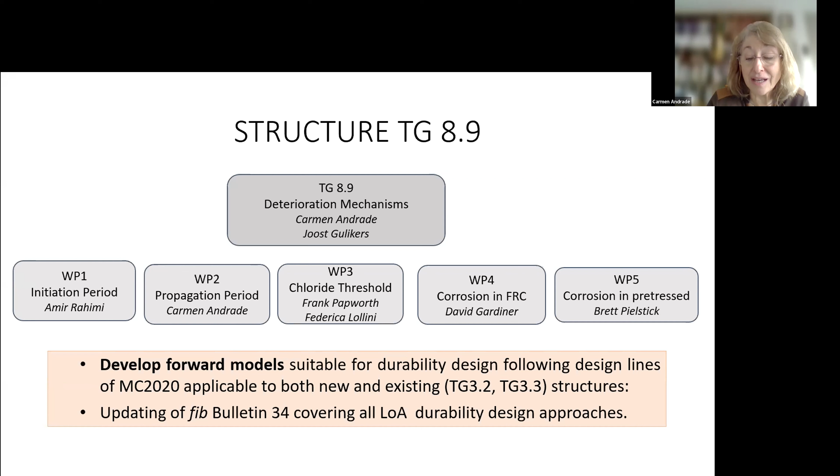Good day, everyone. I use good day advisedly because it's different times in different parts of the world. I'm going to be talking to you about a bulletin that we have started to produce, and I will start by describing that. It's on the critical chloride content of concrete.

The objectives of the bulletin were to give clear guidance on the use of CC, critical chloride level. The bulletin will review the research on critical chloride, and there is an absolute abundance going back over 50 years. We're very fortunate that Ueli Angst has done a great job over the last probably 5 to 10 years reviewing a lot of that information, and his latest paper was published in 2022.

He will be on the committee and will provide invaluable input on that. One of the main things this document wanted to address was the extension of the critical chloride level from the current single version in Bulletin 34, FIB Bulletin 34, to try and tighten it down for different exposures and so on.

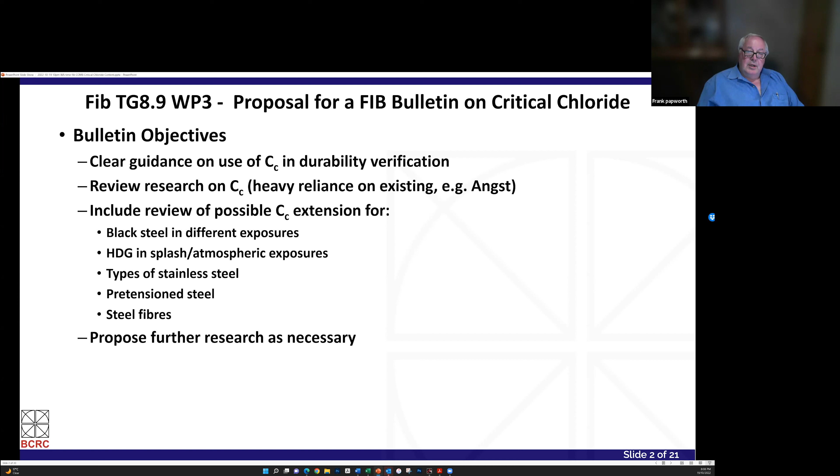So there's a list of the different things we wanted critical chloride distributions for. Apart from identifying these things, we also wanted to identify what research was still needed, and I think that will tie in with new and better models over the next decade.

So far we haven't had a committee meeting for this working party. We do have a draft document, an incomplete draft I should say, which we want the committee to review and help build up. Anybody prepared to join that committee should contact Federica.

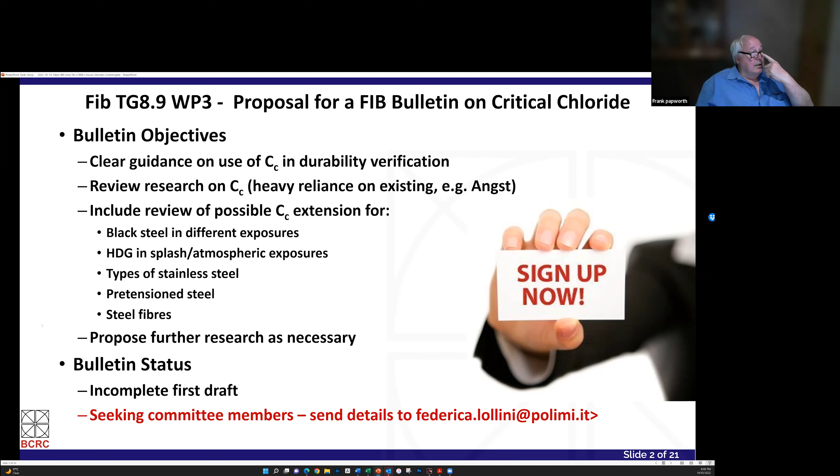First of all, then, what is CC, the critical chloride level? It's essentially, as we probably all know, the level at which steel might start to corrode.

For many years in the early days, back in the 70s, a lot of people were using a single value. These days, we pretty much all use a distribution for the critical chloride level, and it's quite a wide distribution.

There's quite a number of things which will be in the bulletin which I won't be discussing here. They're listed there, it's just not enough time to go through them all. They will be reviewed in some detail in the bulletin based on previous reviews in the main, and there's several major reviews that have been done. It's quite interesting looking back at the history.

The common value for critical chloride is 0.4 weight percent of cement. But looking in the 70s, 80s, and even the 90s, there was never really any stochastic value put on it—it was just a value quoted of 0.4. And very often I couldn't determine whether people were quoting a characteristic value or a mean value. So we need to be careful when we look at some of these old texts and compare them with more modern data.

Bulletin 34 published a distribution, and here we can see it with a mean value of 0.6, a standard deviation of 0.15, and limits to the skewed distribution. That's how the critical chloride level is defined in Bulletin 34. I did try and find where that came from, but it's unreferenced. We assume that Bulletin 34 in general came from the DuraCrete project, so we assume it came from there.

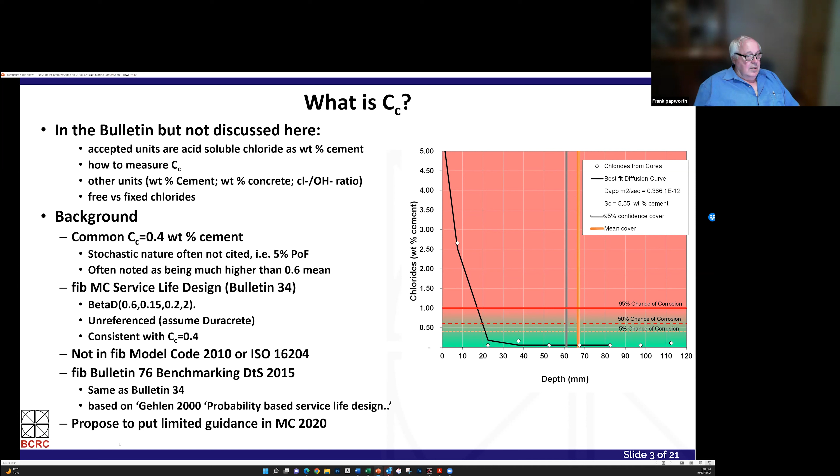We also think there should be some guidance on how to limit the use of the critical chloride value in Model Code 2020.

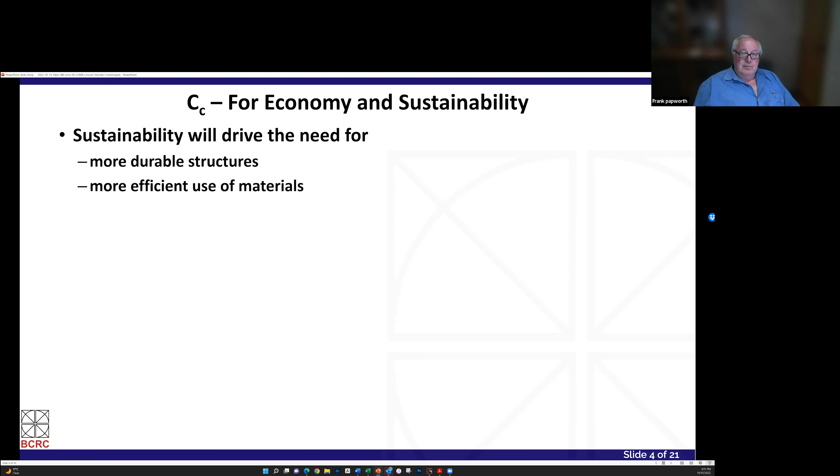Why is it important to know more about the critical chloride level? Well, sustainability is becoming ever more important, and that's going to drive the need for more durable structures and more efficient use of materials. Having a good model and great understanding of critical chloride is essential if we're going to benefit from that. These values will drive the use of these materials because we know how to use them, and we will know how durable they will be—so huge potential savings on whole of life costs.

So in my opinion, because there is still such consternation, as we'll see, about what the critical chloride distribution should be, research funding for the critical chloride value and modelling would reap huge global rewards in the future. And we'll get some inkling of that.

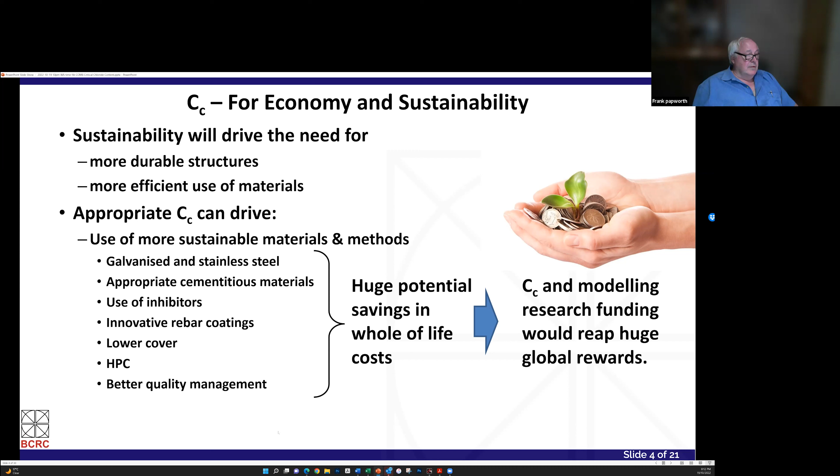The fickleness of critical chloride—it was interesting, and we will hear from our next speaker about his experiences with high chlorides and no corrosion. Going back to 1973, Stratfull looked at bridge decks and the critical chloride level for 15 to 25 MPa concrete. So this is concrete of very low quality, if you like. That's also an issue we need to bear in mind: people are developing values for very different quality bands of concrete, and we shouldn't be mixing them up.

What he recorded was that the chloride level determined whether the steel went from passive to active, but he found there were certainly lots of cases where the steel had become active with no visible corrosion, which tells us that visual assessment is probably not the right way for assessing critical chloride values.

He also noted that the actual rust that occurred depended mainly on the moisture content. He found no corrosion in cases where there were massive salts, unless there was sufficient moisture. He concluded that a prerequisite level of chlorides for bridge deck corrosion was 0.32% by weight of cement, but pointed out there's no corrosion at very high levels of chlorides.

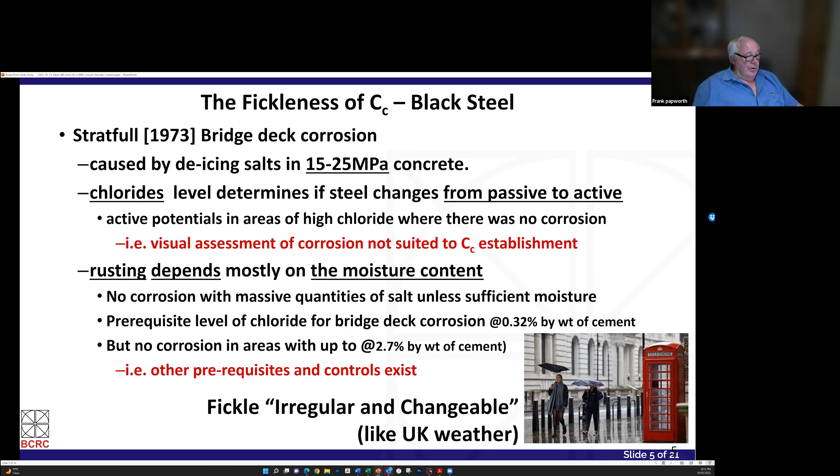So CC is expressed as a distribution for full probabilistic analysis, but wasn't considered as a distribution generally until the 1990s.

Already mentioned that in the 1970s, it was suggested, based on early research such as Stratfull's, that there were three main prerequisites for corrosion: chloride threshold at the reinforcement, voids around the reinforcement. And when we talk about voids, you might be thinking of honeycombing, but we're really talking about much smaller voids in terms of this corrosion.

We should, in fact, just exclude honeycombing, large bleed defects, etc., from our analysis of CC altogether, because we just shouldn't permit those things.

And the concrete within a certain moisture range was necessary. Low moisture contents, high resistivity, no corrosion. That might be irrelevant for chlorides. It's a fact. And saturated concrete has voids filled with high pH water, which is important.

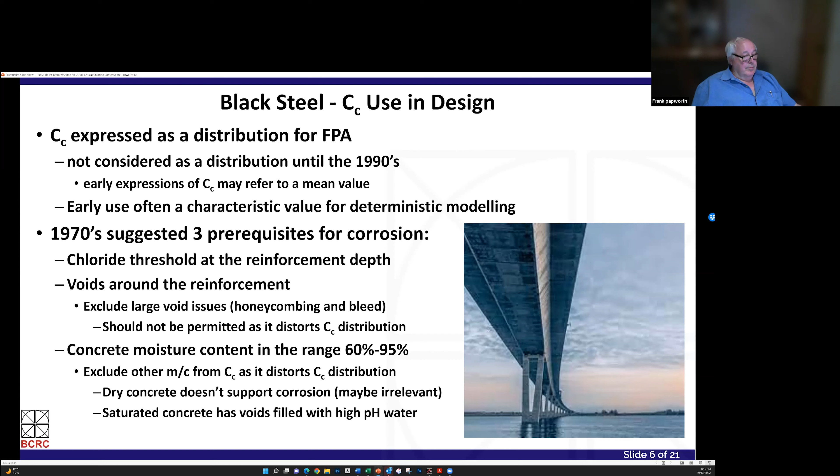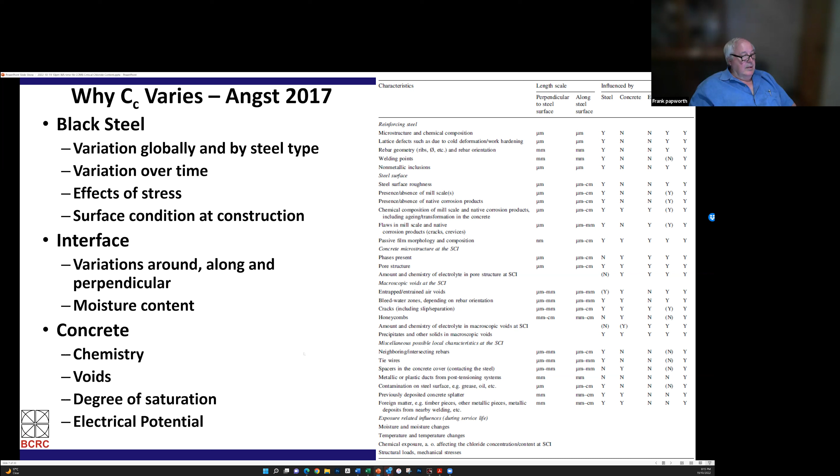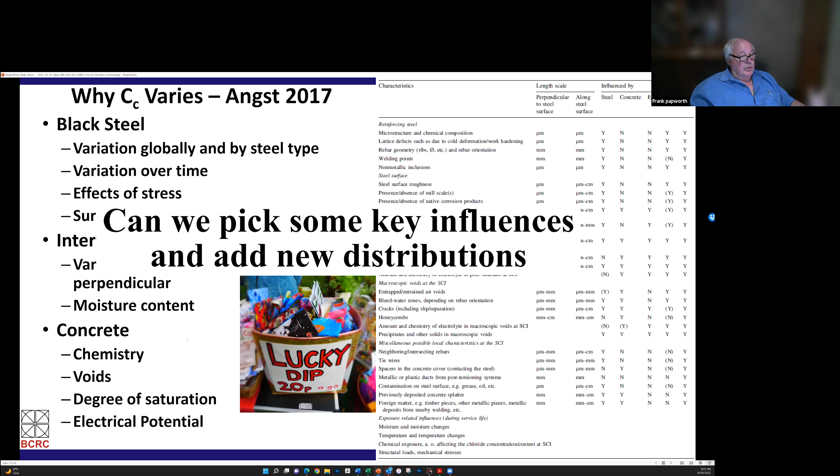So if we have this wide distribution, which is unsatisfactory, are there some key influences that we can add and give new distributions for, but actually hone down on what those distributions are, make them narrower distributions? Well, I decided I'd have a look at the FIB distribution.

This is pretty much the FIB distribution, 0.6 mean with a standard deviation. But I created that by just arbitrarily creating a load of critical chloride values, which would give me that distribution.

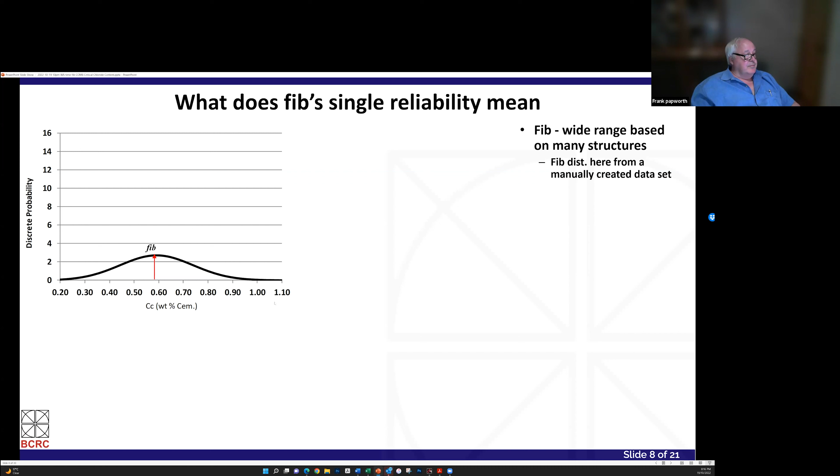My concern was that, in fact, that wide distribution of FIB was made up of distributions of low quality, moderate quality, and high quality concrete. And I wondered what would happen if I modeled those different concrete qualities.

So you can see here, I've got the mean critical chloride level, standard deviation, characteristic values, and these low quality, medium, and high quality concretes were created from exactly the same data that created this curve for FIB. If I just took all the data from these three curves, I would get this one. So it's just splitting the data up for the different structures.

And you end up, when I split them up - now I have to accept that that's arbitrary - that you could end up with poor concrete with a critical chloride level of 0.38, and high quality concrete with a critical chloride of 0.71.

At that point, I decided I would compare it with research. This goes to Pettersson's data, which was from 1996, where everything was kept the same except water binder ratio. He measured the chloride threshold, and found that water binder ratio probably affects the voids, which affects the chloride threshold. What he found was, for a water cement ratio range of 0.5 to 0.32, critical chloride ranged from 0.4 to 1.

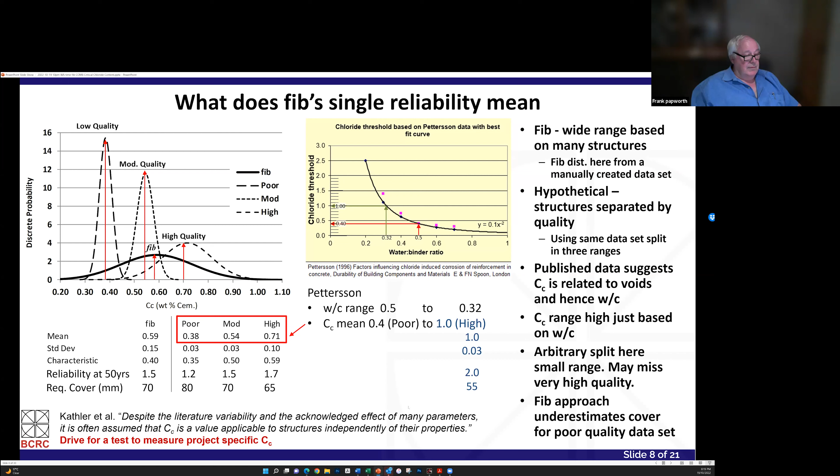I won't dwell on this, because somebody's going to give a talk on this particular aspect, the critical chloride level for a structure. I'll just make the point that it's interesting.

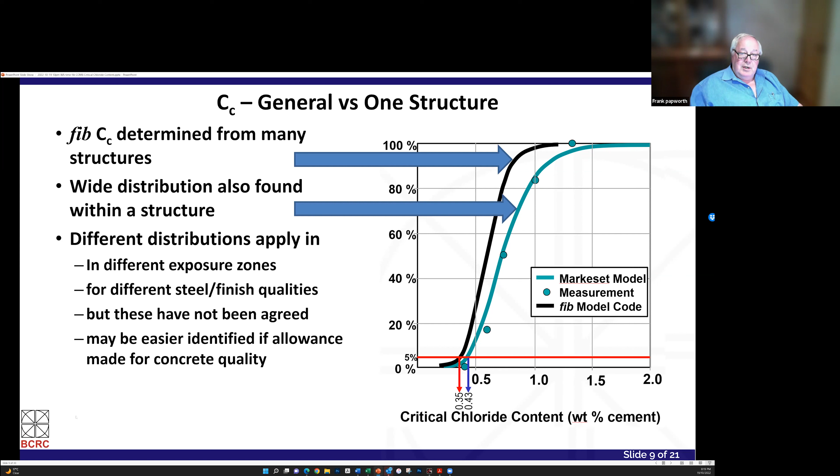This is the FIB distribution for critical chloride, and this was the distribution for a particular structure - they're not so far different. So we need to bear in mind that even on one structure, the variability can be quite high.

So what value for CC in atmospheric zones? Angst says we need more but a narrower distribution. What factors will yield a significant improvement in the outcomes? That's one of the things the bulletin needs to get into more detail on.

We have a currently agreed distribution in FIB Model Code Service Life Design, very, very broad, and we really do need to apply some limits to that, such as the other prerequisites I talked about, and the reasons why we discussed that. I would love to give you more distribution based on water cement ratio, but that's going to take some discussion and review of the data.

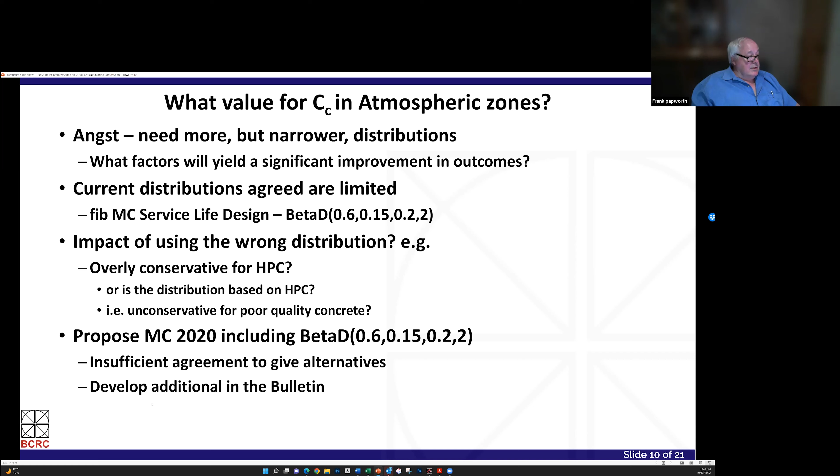Now I'd like to briefly look at immersed concrete samples. This is a test which I think Harrison did in 2014, but it was based on work by others, where you take water samples with different chloride contents, and in some you put in some cement.

What you find is that in seawater with no cement, you've got corrosion. In seawater with a bit of cement and 10% chlorides, you didn't get corrosion because of the cement. And even at very high salt concentrations, you still didn't get corrosion.

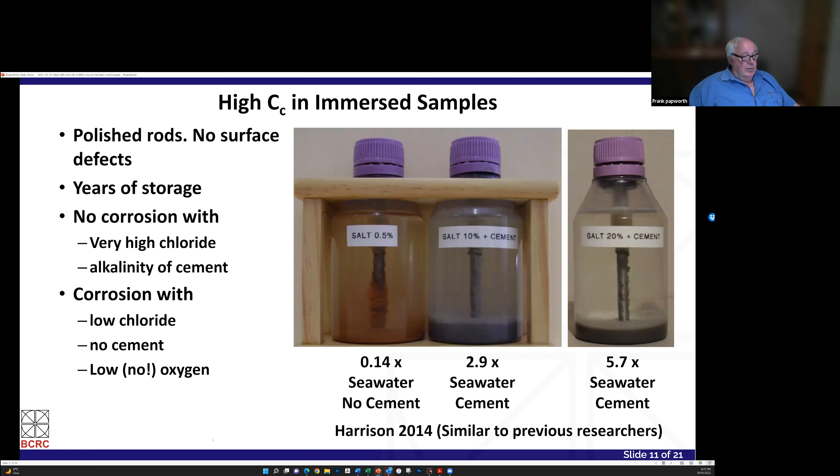What that's pointing to is, if we have saturated concrete with voids filled with water, which will leach the hydroxides in the concrete, you will have high pH. Therefore it's not surprising that we don't get corrosion in the underwater zone, because the critical chloride level will be very, very high.

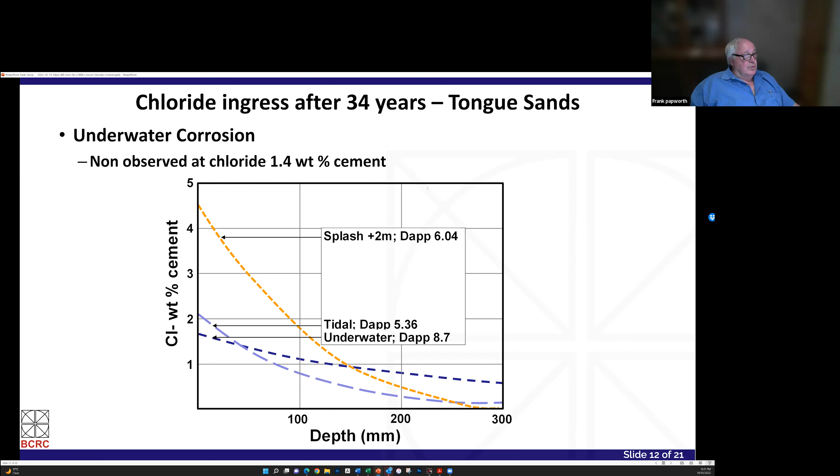This was some early work I did on Tongue Sands Tower, where we took cores from the underwater zone, and we found there was no observed corrosion at the reinforcement depth where the chloride levels were at 1.4, which tends to be supportive, and there's other data which is supportive of that.

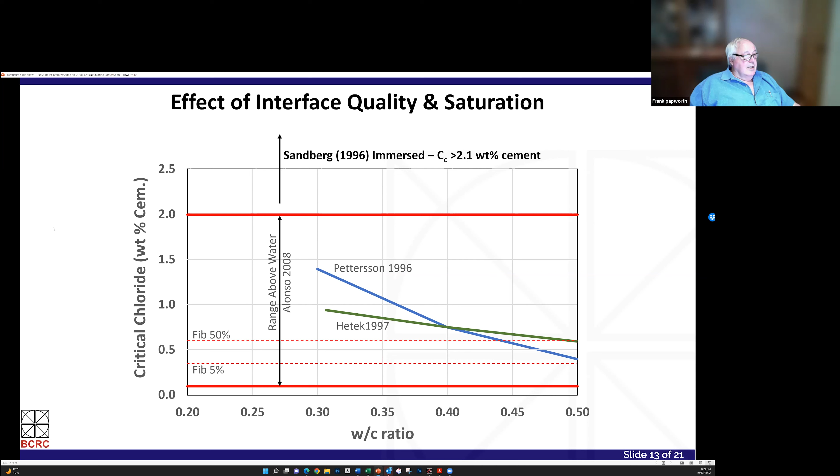Sandberg found the critical chloride level for the immersed zone was 2.1. So we can start to say that maybe we can set up this as our critical chloride level for normal black steel in the atmospheric zone, and then maybe we should use this curve for the immersed zone.

That was found by Izquierdo. In fact, maybe it's a tighter distribution than he found - we'll have to look at that.

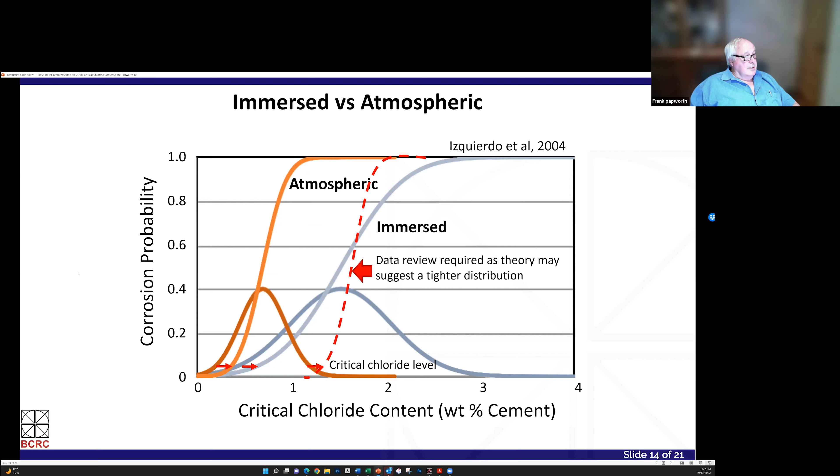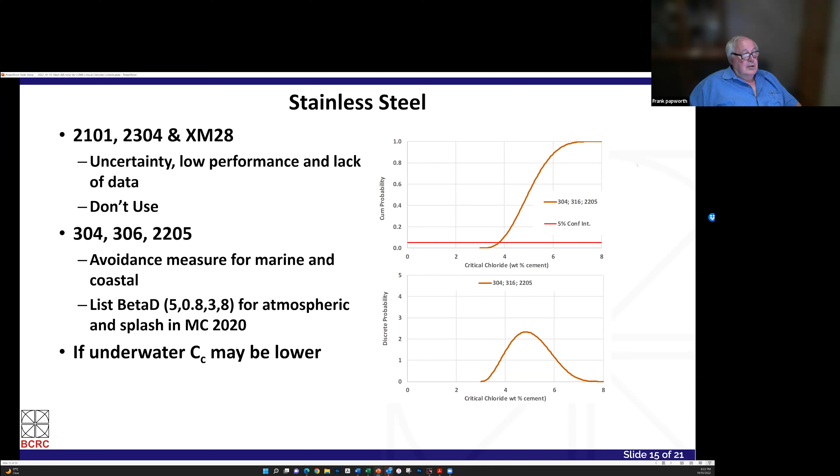I won't dwell on stainless steel, just to say that I don't think it's appropriate to use stainless steel as an avoidance measure without really understanding when it might corrode and what different stainless steels might do. So we should develop critical chloride levels for stainless steel.

Similarly, for galvanized reinforcement - this isn't being talked about, but Lollini's paper covers it, so you can ask her questions about this - came up with a mean value of 1.2 for the critical chloride level for galvanized steel.

I won't dwell on this either, just to say that I did go to a conference in Portugal on corrosion of steel, and they were talking about reinforcement corrosion, and were horrified when I suggested using hot dip galvanized bars in coastal environments where there's chlorides.

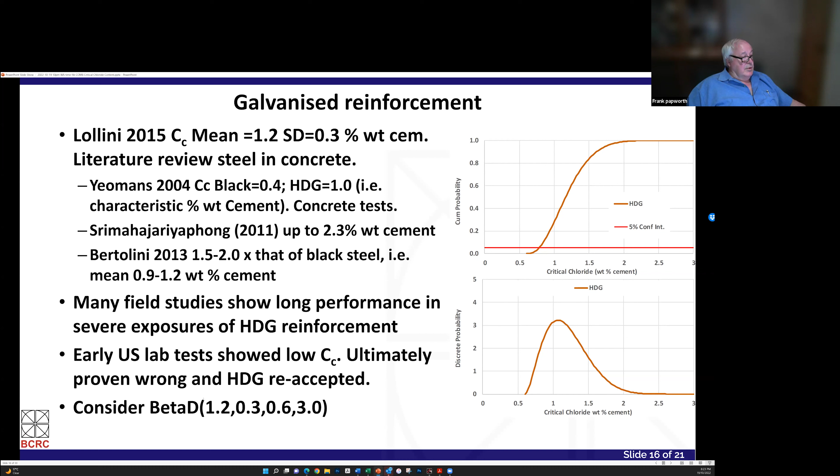I think that all stems from some early US lab testing showing a very low value for CC, but it was accelerated testing, and ultimately that was proven wrong, and HDG is now accepted. I think we're considering this beta distribution for galvanized steel - just important to understand why.

And I've seen myself how you can save millions of dollars on large bridge structures by using low covers when the mixes and everything is properly designed.

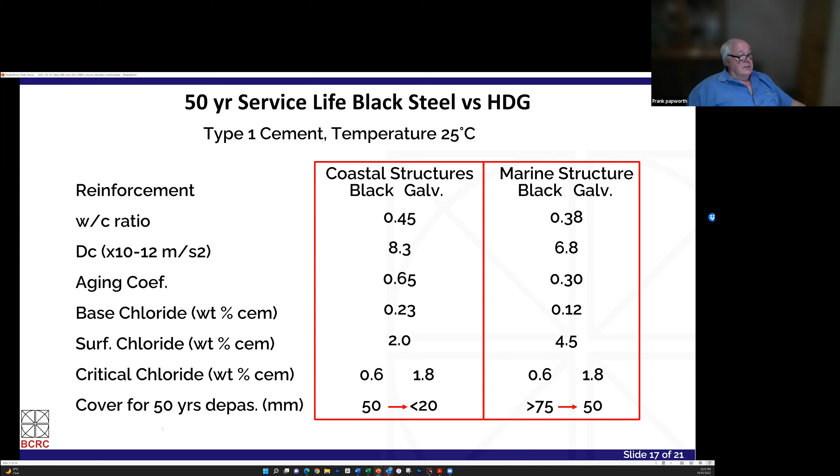The last one is looking at steel fibers. This is some work by David Gardiner of SMEC, where brine outfall tunnels, 2 times normal seawater level, had precast segments made using steel fibers.

He was clever enough to put in some samples that he could test subsequently, and what he found - I've forgotten what age this is, I think it was about 9 years - was that there was no fiber corrosion past 2 millimeters, suggesting, based on the chloride profiles here at 2 mil, that at 2.8% weight percent of cement, they had no corrosion.

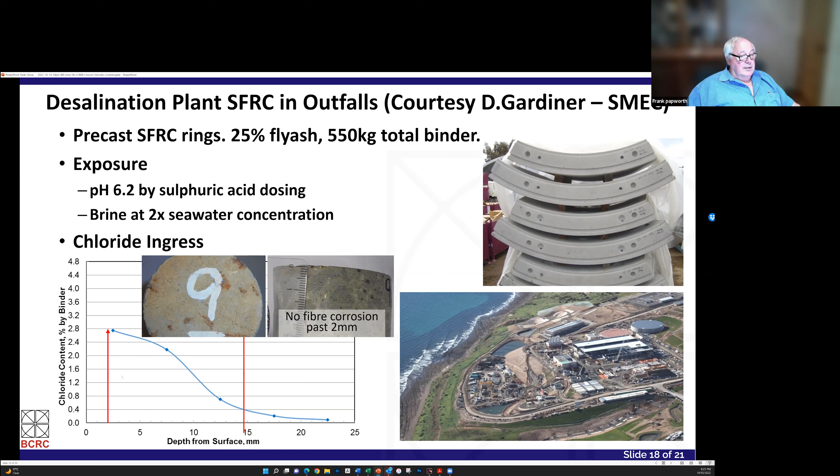Based on that work and other work, we might suggest then that for steel fibers, you use 3% by weight of cement as your mean critical chloride level, and you design a sacrificial layer for your concrete based on the initiation depth and the design life using this critical chloride level.

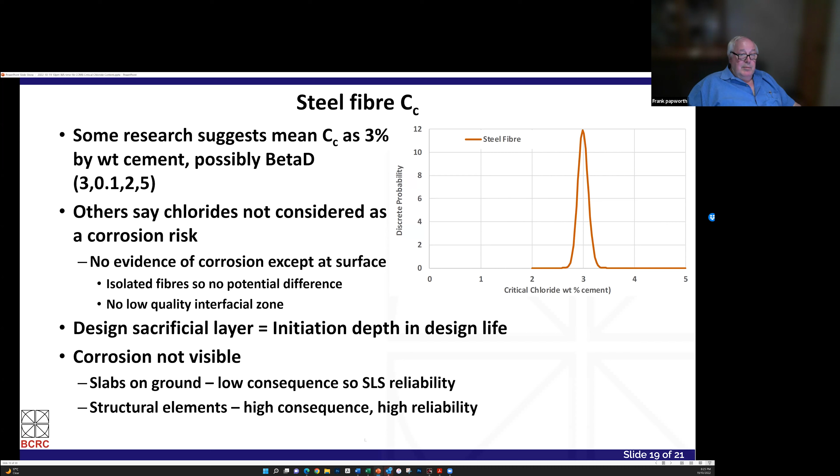I won't worry too much about this. It's just looking at what reliability values you might use for different situations using steel fibers.

In my conclusion then, is use of Ccrit currently viable? I will quote Angst, as I promised him I would. He says it is an illusion that Ccrit can be predicted on the basis of mix proportions. Ccrit will always be the result of the entire steel-concrete interfacial system and the exposure conditions. And I agree with that. All the research shows that.

However, I believe that we sometimes overlook small improvements, if you like, and that using Ccrit and modeling is already a better approach than deemed-to-satisfy, because it does enable you to vary certain things once you've calibrated your model. So I think it's already better, but we need to go further.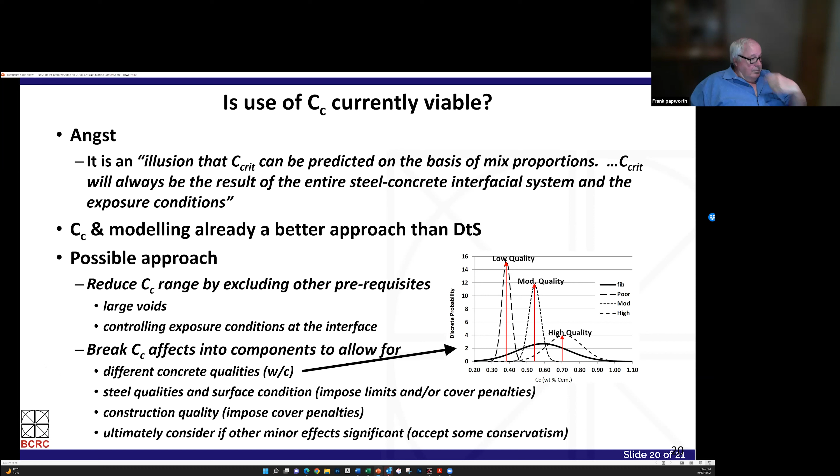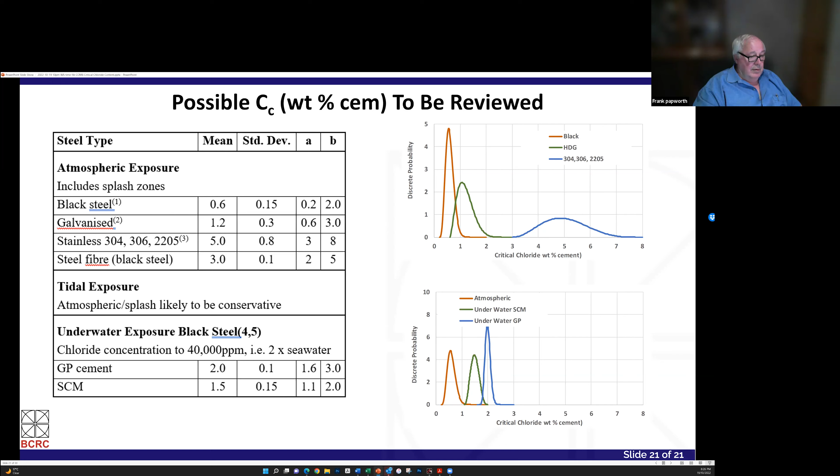So that's the summary of what I've currently proposed should be used for critical chloride levels in design, but obviously we're looking to go further. Thanks.

Thank you, Frank. I have a point I will address in my presentation, but I don't agree that it is in the 90s when the distributions appear, because Hausmann, who was the first proposing a chloride threshold in 1967, he proposed a distribution already.

Okay, we will comment on that. If not, there are no others, we can go.

As you were around at the time, Carmen, would you agree that in the 70s and 80s, a lot of people were quoting critical chloride levels without saying whether they were characteristic or mean values?

Well, I will address this in my presentation, but the people trying to obtain the chloride threshold used different techniques and different definitions, and that is the basis of the discrepancies. In fact, I was fortunate enough to meet Hausmann at a congress, and he explained to me what he did.

That is why I started to make a statistical study, because you need to have several identical specimens to obtain the statistical distribution. People were communicating the chloride threshold they found depending on the technique, whether it's natural or a polarization curve or whatever.